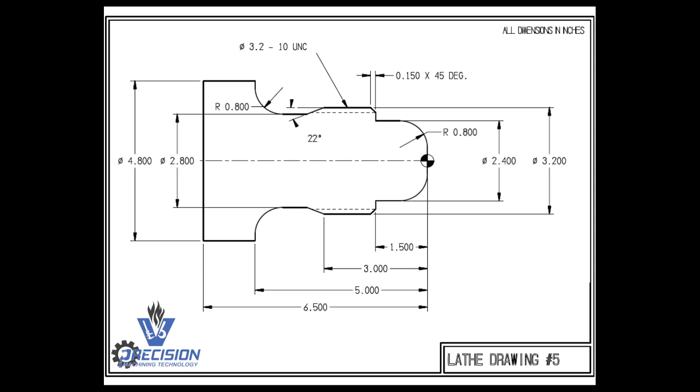Let's go ahead and get started with the drawing itself. I'm going to do the same thing I've been doing - draw the upper profile using parallel lines, then trim everything, fillet, and chamfer at the end. We will have to create this angled line here, so that won't be too hard. We'll get that done, but let's go ahead and get started.

I'm going to do a save as. Okay, and this is going to be my create drawing number 5.

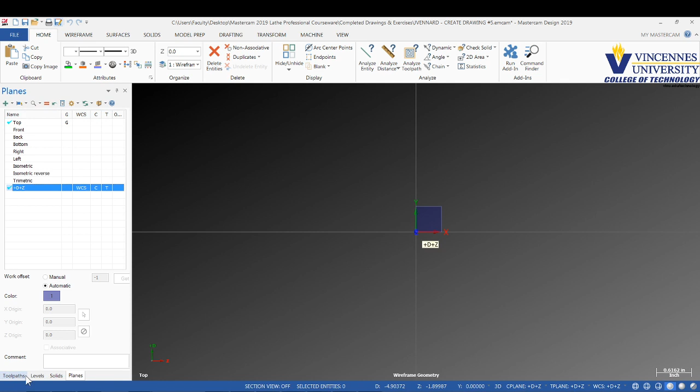I'll go ahead and start drawing with my levels. Level 1 is going to be my wireframe geometry. Then I'm going to go to my planes and go to my D plus Z plus lathe plane. All right, and then I'll get started drawing, here we go.

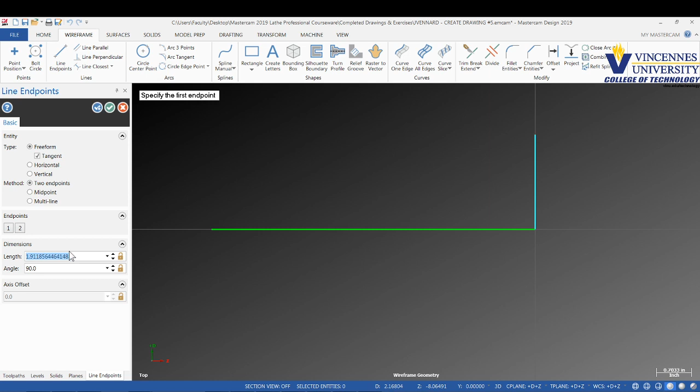I draw my axis line. This part is 6.5 inches in length. Zoom out a little bit there and get that centered up. Then the largest diameter is 4.8 inches divided by 2, because I'm drawing the radius here. That's going to give me lines now that I can go parallel to, to create all the other features.

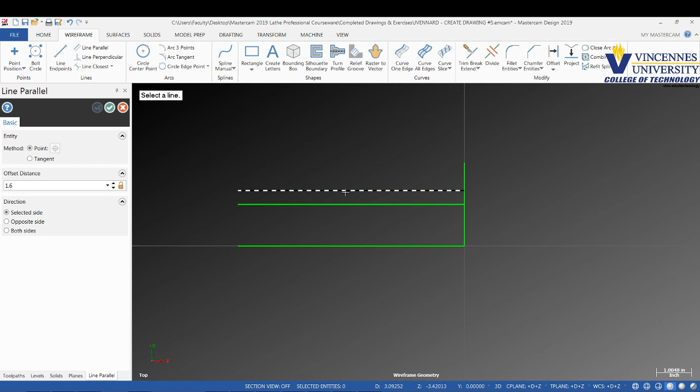So let's start out by getting all my diameters done. I'm going to do a line parallel to right here. Looks like my smallest diameter on my print's 2.4 divided by 2 - we're dealing with the radius. Then the very next one is the 3.2 divided by 2. Then the back edge, we've got one that's going to represent the 4.8 out here. And then one more that's going to represent the relief groove, which is 2.8 divided by 2. I believe those are all of the diameters that I need to draw in, so we should be good there.

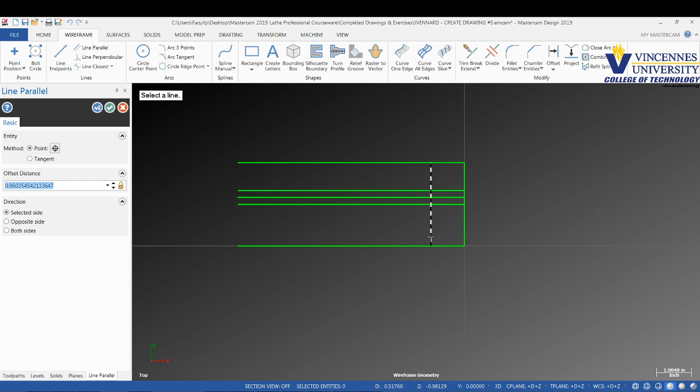Now let's go through and create all the vertical lines. First one I'm going to do is back 1.5. The next one's coming back 3 inches. Then another one coming back 5 inches. And then the very last one, all the way back to the end of the part, should be 6.5. Okay, so we've got all of our lines created.

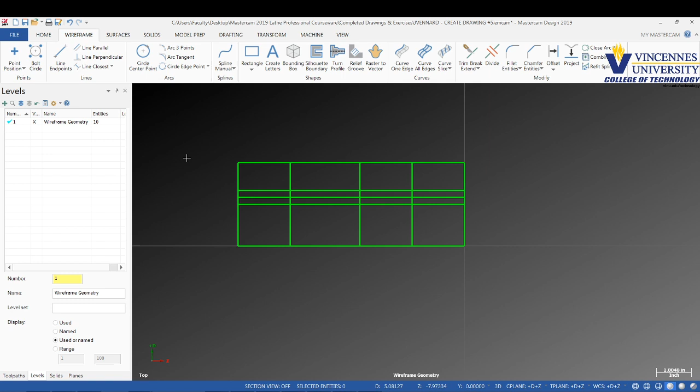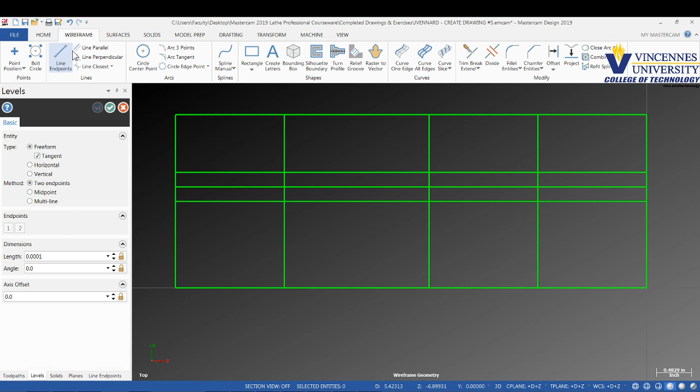Now what we'll do is go ahead and draw in what looks to be the angle coming from this intersection right here. If I click on this and hit F4 to analyze it, that's my 3.2 diameter - see where I'm at in D there, 3.2. So there's a 22-degree line coming down across this relief groove line here. I'm going to draw a line from this intersection and intersect down to here, and then it's going to be 180 plus 22 for the angle.

All right, now I can go ahead and do some divide delete work, so I'm going to divide this out.

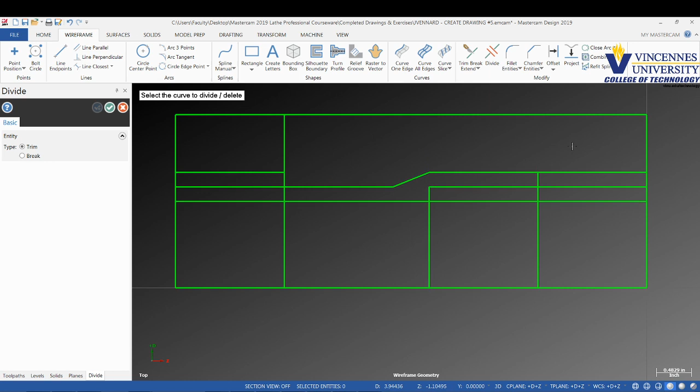All of this can go, and all of this down here can go away. Now we need to get our smaller diameter here. So as this comes in, it's going to be this diameter. All of this can go away.

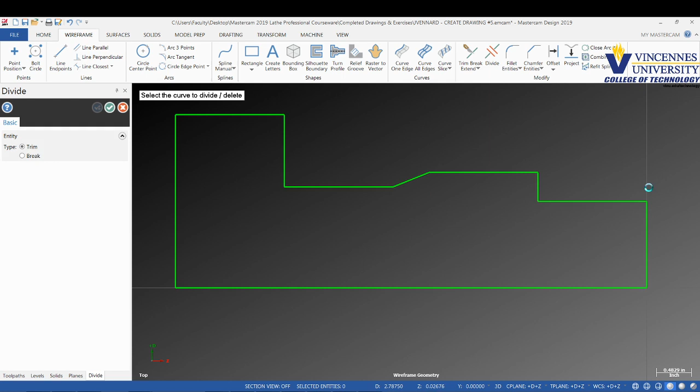That should represent, if I check my lines here by analyze, 2.8 for the relief groove. This should be 2.4, 2.4, and 3.2 right here. This should be back 1.5. Looks good. The intersection of these, the green point, looking at the green point,

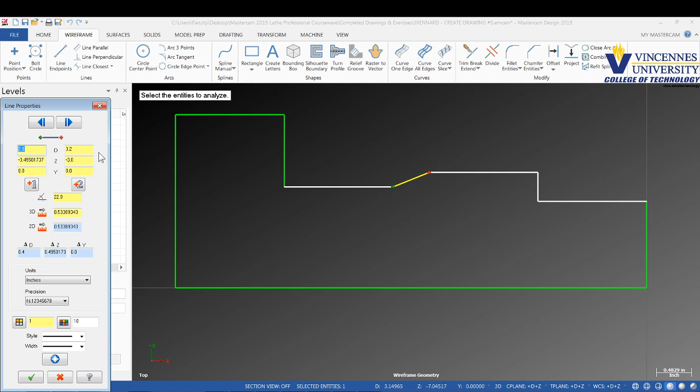looks good. And the front of it's at -3. That's the red point. Looks good. Okay, I'm happy with it all.

Now I'm going to come through and put my 800 thousandths radius in. 0.8 radius right here. There we go. That's where that radius goes. And then there's one on the leading edge up here as well, also 0.8. So we'll put that right there.

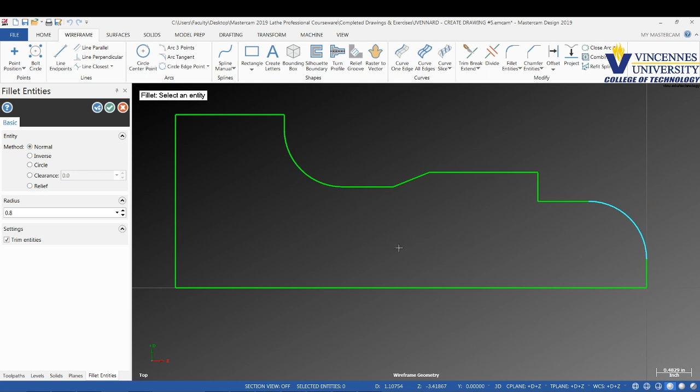We're going to put in our 150 thou chamfer, so 0.15. That's going right here. And looking at my print, that looks like everything I need to create for this drawing. So that's the profile of this part. Let's go ahead and create a solid model.

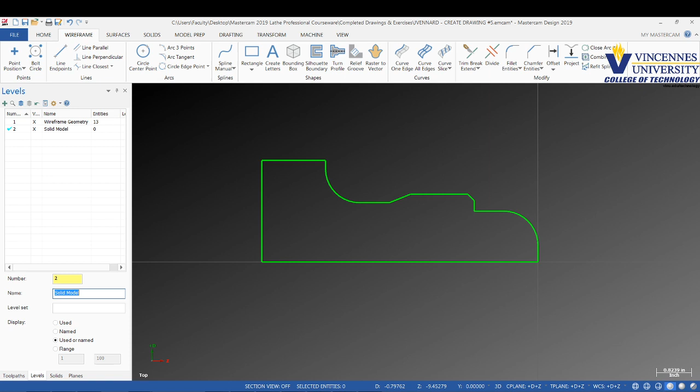We'll do that by doing a solid revolve. Revolve this whole part, pick our axis, there it is, and then we'll create a level 3. Level 3 is going to be our dimension geometry.

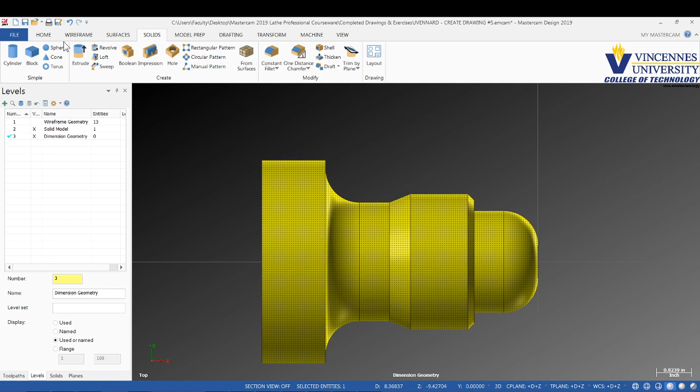So I'm going to shut level 1 off. I'm going to select the part and do a turn profile. So back to wireframe, turn profile. I'm going to do the full profile, that way we can get the full profile of the part here, so we can create our dimensions.

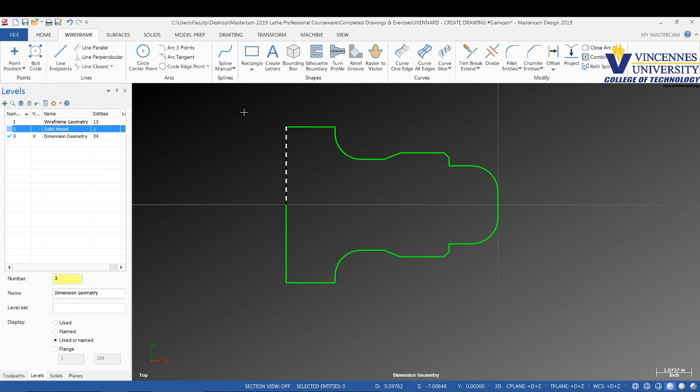So like I said, we checked a lot of this with the analyze, which is another way you can do it, but this is just the best way to really see them and make sure you have a good drawing. So we'll check out our largest, 4.8 looks good, 2.8 looks good, 0.8 looks good there. Okay, we can go ahead and check our other diameters.

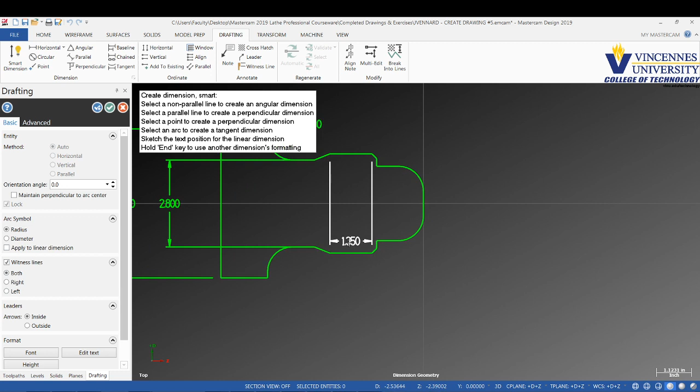3.2, 2.4, those look good. After that, we can check our lengths.

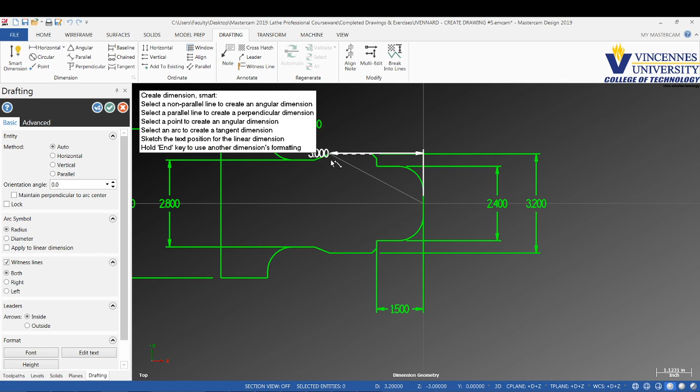So we can say, hey, how far is it from back here to back here? There's our 1.5. Then from here to this point, here's our 3 inches. Okay, from here to right here, 5 inches, looks good. And then the overall length of the part, hopefully, will be 6.5. There we go. So that one's 6.5.

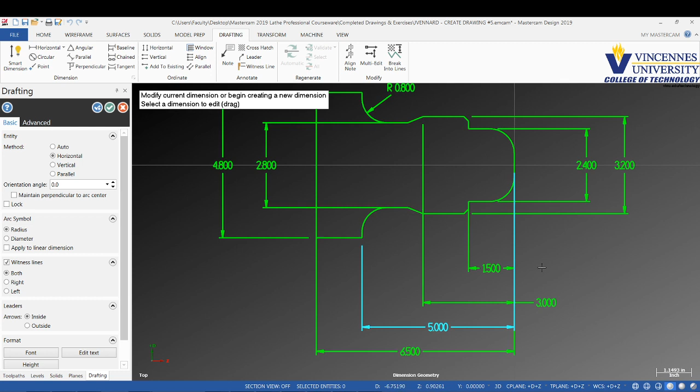Put this one in the center here. There we go. Move our 3 in here and put it in the center, that way everything's kind of stacked accordingly. We can double check our other radius here. Looks good. Obviously, hopefully we didn't mess that up by changing that.

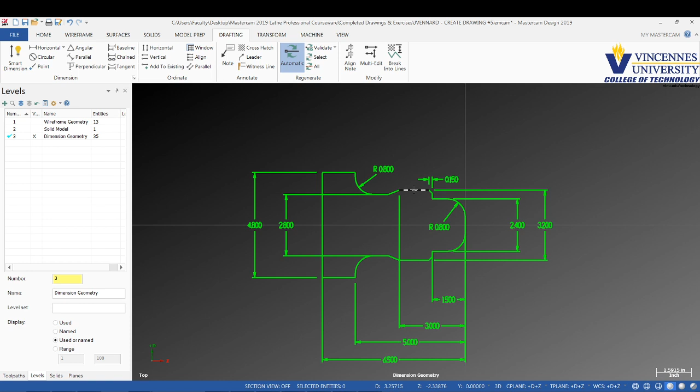There's our chamfer. And as I look at my print, I don't see any dimensions other than the note that's telling you this is a 3.2 by 10 UNC thread. So that's something else we're going to be working on, but we don't really need to mark that on the print. It is 3.2 major diameter, so we're good there.

Okay, so we've got this thing all created, all ready to go. We are ready to basically move on to programming this part. So that's what we'll do in the next video. Since we've got it created, go through and double check all of your geometry, make sure it's good to go, and then if it is, go ahead and move on to video number 2.